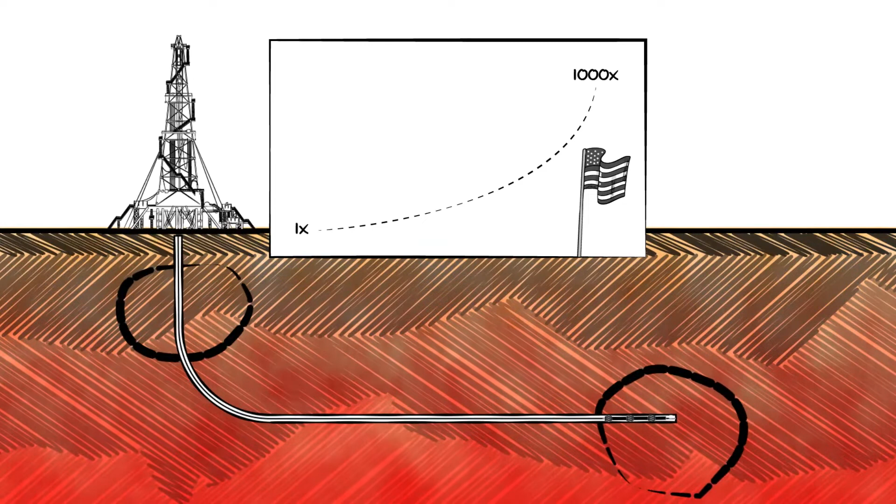It was rapidly adopted industry-wide and resulted in the U.S. shale boom that rearranged global geopolitics and ushered in an era of unprecedented energy security for the United States, taking the world by surprise. As pioneering teams charge into the field, experimenting with novel, scalable geothermal concepts, many in sedimentary formations leveraging the very techniques that Mitchell pioneered, the parallels between the shale boom and the coming geothermal boom are clear. But entities on the sidelines, including big oil and institutional investors alike, are awaiting one thing before jumping in: field data.

In the coming sessions, we have invited startup teams who have deployed new concepts, techniques, and technologies in the field this past year, and who have agreed to discuss previously unreported data and outcomes. So sit back, get your questions ready for the teams, and see if you can spot a geothermal George Mitchell.

Hey everybody, Jamie Beard from Project InnerSpace. Last was awesome, how did you guys like it? Pretty cool. So I remember back in 2020 when we started Pivot, it was really hard to get people from the oil and gas industry to talk on the record about geothermal. And they did, but the understanding was it would be vague and we wouldn't talk about what the entities were doing in particular. It was all hypothetical. Oh my gosh, look at how much that's changed in 2 years. I love it, it just absolutely makes me so excited.

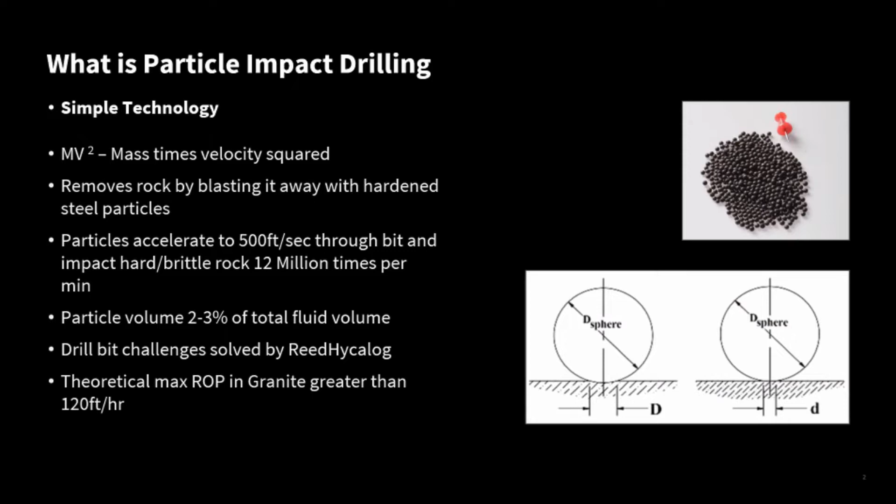It is very straightforward really. It is taking high density steel shot, the commodity item that any of us would use in a shot peening shop around the world to clean tools, etc. We inject it into the flow line in between the pumps and the top drive. Those steel balls pass down the hole and they accelerate into the drill bit particle accelerator. As they accelerate into that, they reach up to 500 feet a second, and just sheer unadulterated physics means that we get 12 million impacts per minute at 500 feet a second coming out of the bit. So we literally blow away the rock.

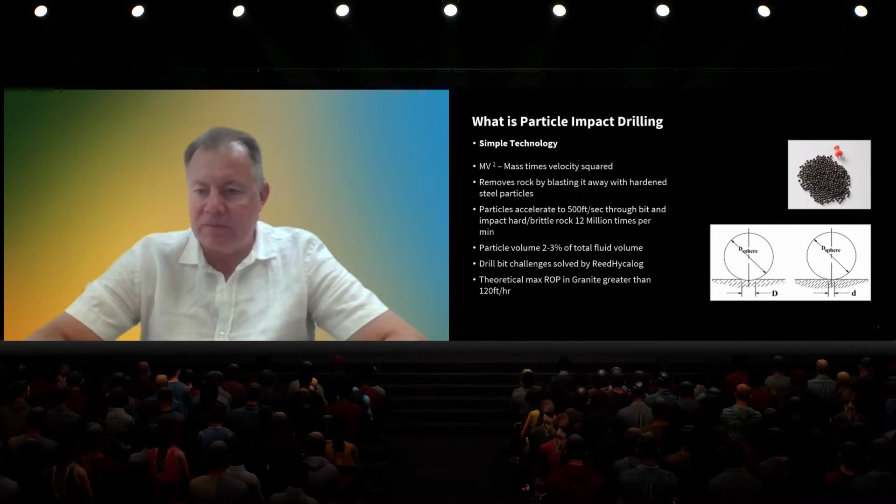Total volume is 2 to 3%. Simple technology. But the fantastic thing in this is that theoretical ROP is greater than 120 feet an hour, 40 meters an hour to those of you in metric. So this has the potential to drill significantly faster than any of the best PDC technology out there in the world at the moment.

It's straightforward. So you can see from the images on the screen, we have effectively a large particle processing unit, which looks like a cement mixer that you would see on the highway filling up the concrete. We then have a particle injection unit, which has 3 high pressure cylinders in it that we sequentially fill with the steel shot. One will be injecting, one is on standby, one is getting refilled. We then have a control monitoring cabin where the whole process is controlled, and this has been through all the checks and tests and is fully commercial and operational. And then for those of you thinking about what happens to the steel shot when it comes back out of the hole again, we have a triple decker shaker.

So we're typically going to get little arrowhead pieces of granite that are the little peaks that will break off. We'll get the arrowheads coming across the top shaker, the steel shot coming across the middle shaker, and the fine broken up feldspar and quartzite coming across the bottom shaker.

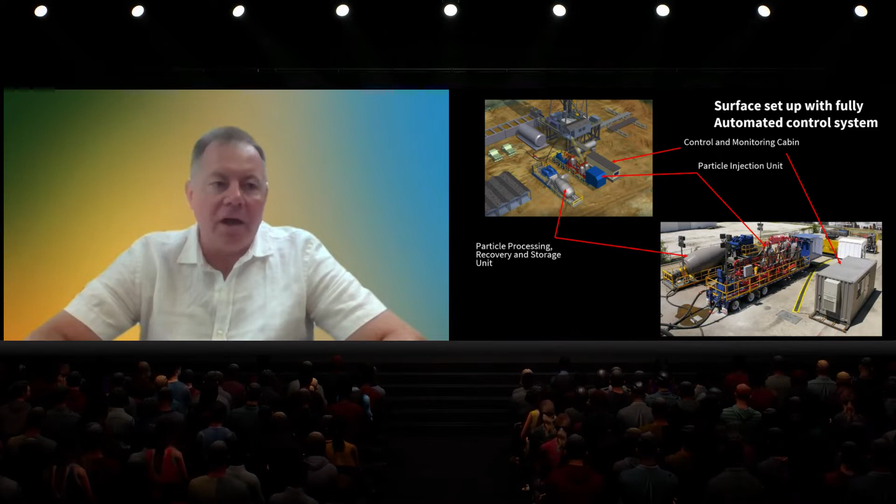So nearly all of the shot is recycled and re-injected and pumped around the hole. The other simplicity of this is how simple it is.

Some questions came up in the last session - what does a geothermal rig look like? Really, we can take any land rig anywhere in the world. Ourselves, we went and drilled with an old Kelly rig when we were testing this technology, but we can go with a sophisticated rig too.

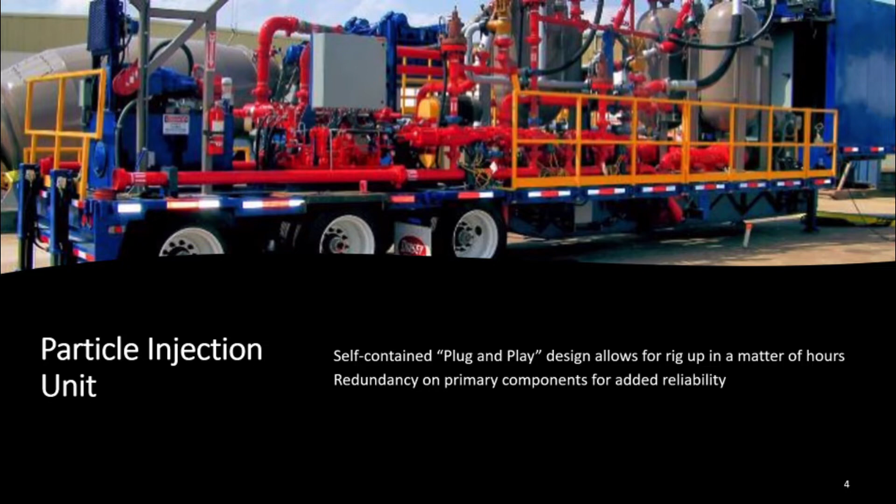So the journey we took is a really nice story. The previous session just had a whole bunch of service companies, and it was good to hear the investments that the different service companies are making in supporting and growing the startups.

So NOV, we met Particle Drilling last year, and we put a joint workshop partnership in place because we really wanted to take a look at the challenges, which was to try and make the particle drilling head, which John and his team knew could drill fast, but you wanted to make sure that the head survived and didn't become the limiting factor.

So when we put our heads together and looked at the technology, we saw - why don't we combine the latest PDC technology with the drilling methodology, which is continuous. Keep adding steel shot to the hole means that if we can keep the diamond lasting, then we can keep injecting more and more steel, and the bit runs get longer and longer and longer.

So we looked at the external design and came up with a plan to have a particle pilot and then a diamond reamer. In the images on the screen, the little grayed out area shows the rock that is being removed by the particles, and the remaining part of the hole is going to be opened up by the PDC.

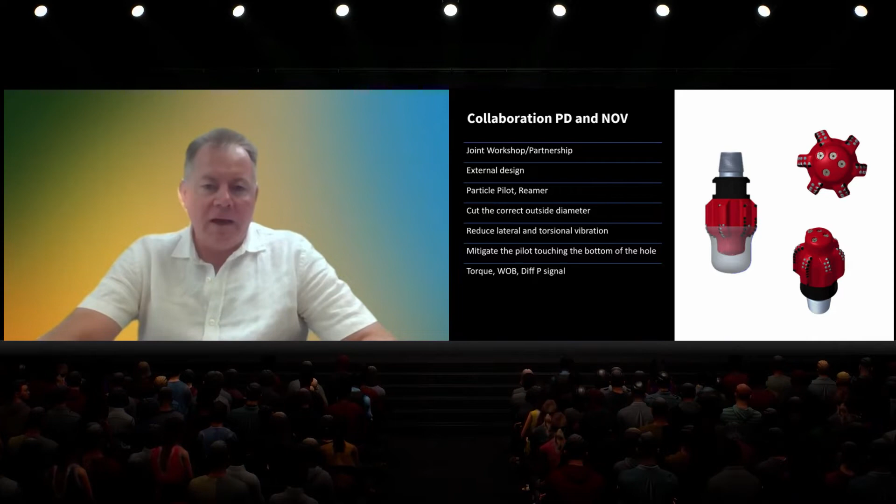So onto the data - we designed one of these bits, and this is the thing that Jamie's been whipping us all about: speed. We all got to get this geothermal bandwagon moving faster, and we really went from first conversation to lab tests in 4 months. It was fantastic.

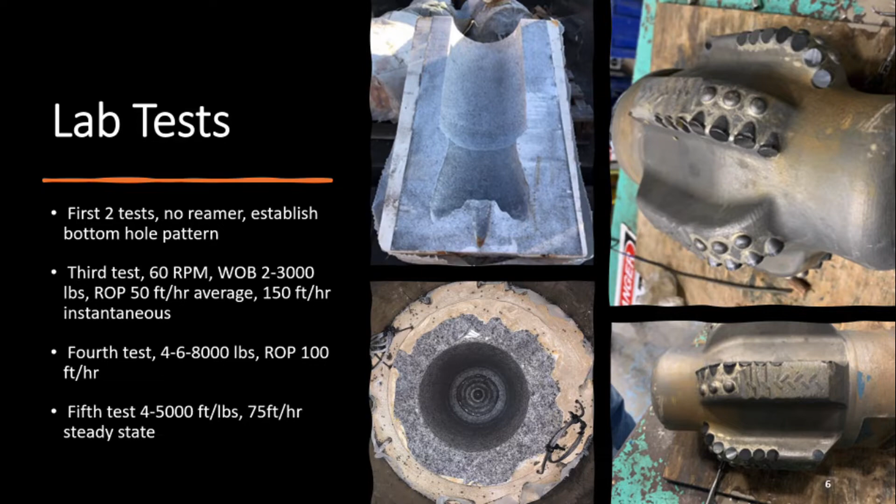So the images you got on the picture show are from different lab tests that we did in the drilling lab in Conroe. For the first 2 tests, we didn't bring the reamer into contact with the rock slab that we had in the drilling lab - we just wanted to see what the bottom hole pattern was doing.

We then did a third test at 60 RPM with 2,000 to 3,000 pounds, and we were doing 50 feet an hour average, but we could get up to 150 feet an hour instantaneous.

Fourth test: 8,000 pounds with an ROP of 100 feet an hour. This is what we want - we're really getting up there into those speeds that make a huge economic difference to geothermal.

And the fifth test was just nice steady state, 4 to 5, and we got 75 feet an hour. You can see from the images that the bottom hole pattern rings are produced from the particles, and in the top left image you can see the kind of pattern that the reamer creates in removing the remaining bit of the rock.

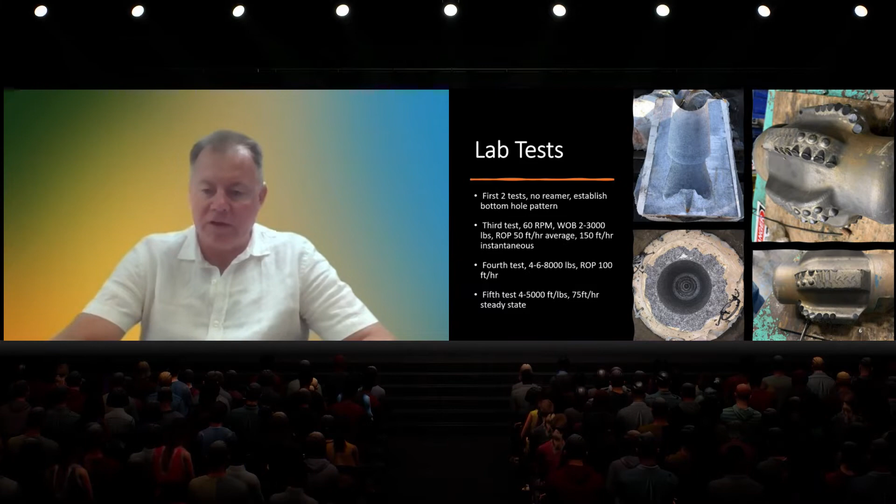So the internals, basically the design is most of the rock is removed by the particles, because we don't want to be limited by PDC. We had to engineer the internal flow paths to make sure that the particles are not eroding the bit from the inside to the outside. So every bit of fluid dynamics design is to minimize any internal erosion. We don't want that to become the Achilles heel of the product, so it's all very smooth flow paths inside the bit.

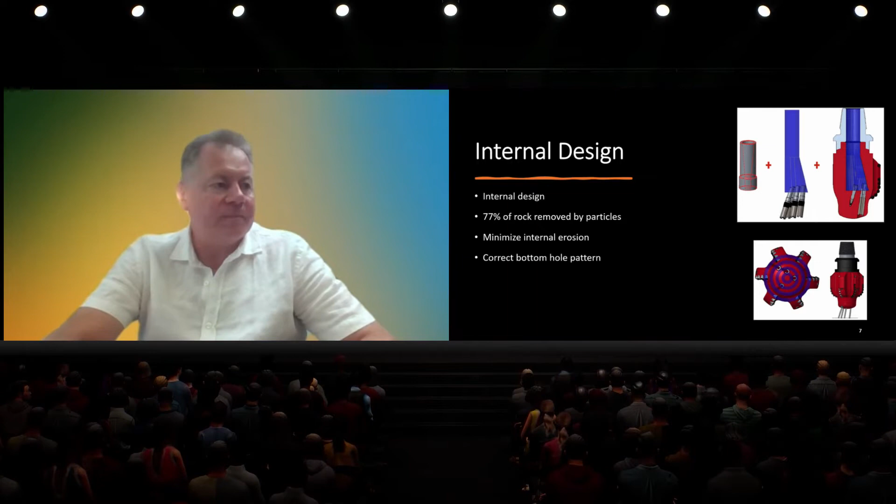So the next step was to go and find a hole to drill. Unfortunately, we couldn't find any of you geothermal gang drilling granite at that time in Texas or in the United States, so we had to find our own well. A quarry owner in Central Texas, who John knows, lent us his quarry.

So we were hanging out there with the people cutting countertops for kitchens, and we spudded into 45 kpsi pink granite. For those of you who aren't geologists, this stuff has huge quartz phenocrysts, veining through it, and large mineralization. So it's really dynamically very hard to drill through.

We ran two particle drilling hybrids in it, and each one did roughly 490 feet. The total footage was 980 feet, or 298 meters, at 43 feet an hour, or 13 meters an hour. Straight out of the box, we felt really pleased with this.

We also, through all the drilling trial and error, pretty well knew what we could do to improve version 2. We had some simple challenges in that we spudded into granite.

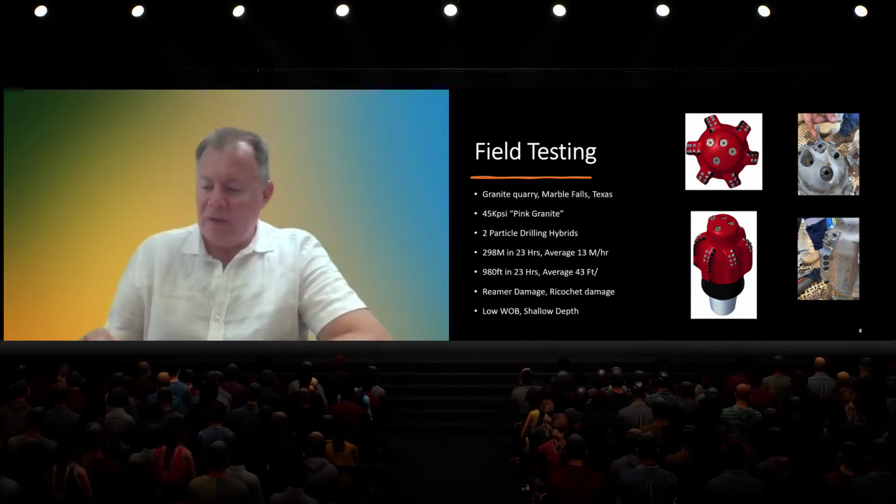But you can see from the images - one of the curious ones - the nose is pretty beaten up and quite eroded. But one of the nozzles that hasn't touched the bottom shows no erosion. So there was a sort of 'ding' moment: what's going on here with the nozzles, because the material they're made of seems to be outliving the matrix the bit was made of.

So as we cut the bit apart and dug into the challenges we saw, we thought, right, number one, let's change the material of the body. Let's go from TMS matrix to cast carbide, which is pretty well the toughest material you can make a PDC bit from.

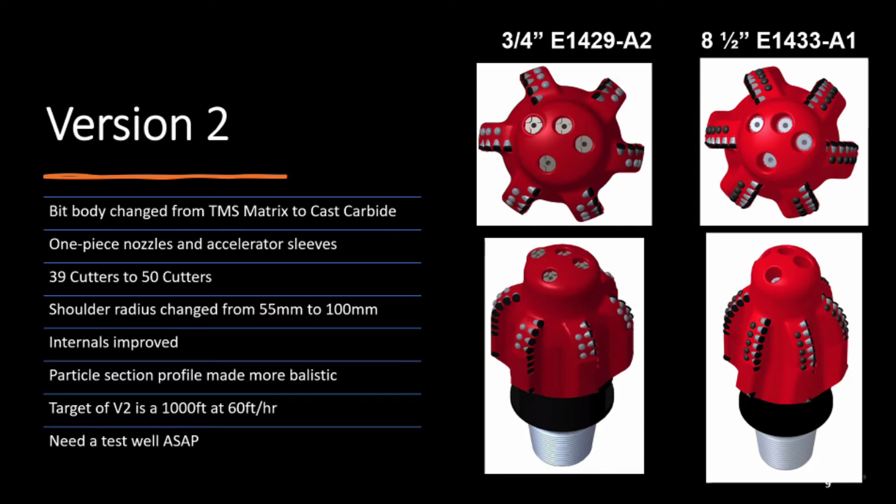We didn't really have problems, but to improve manufacturability, we went to one-piece nozzles and accelerator sleeves inside - six-inch long nozzles inside the bit.

We saw damage on the PDC cutters, probably because the radius was too aggressive, so we opened up the radius to get more diamond in there. An instant upgrade would be to take the best cutters from Forge and put shaped cutters in there, more diamond, because relative to a normal PDC bit, this has relatively low cutter count, so we could afford to put some diamond in there and just make this thing last longer.

We made the nose - if you look at the right and left diagrams between the 29 and the 33, you can see the new one's more ballistic. That's so that when the steel shot ricochets off the bottom, it's designed to bounce off to the side. We want to minimize direct impact - we want glancing blows, not direct hits. With the combination of the cast carbide and the new shape, we believe this will last significantly longer.

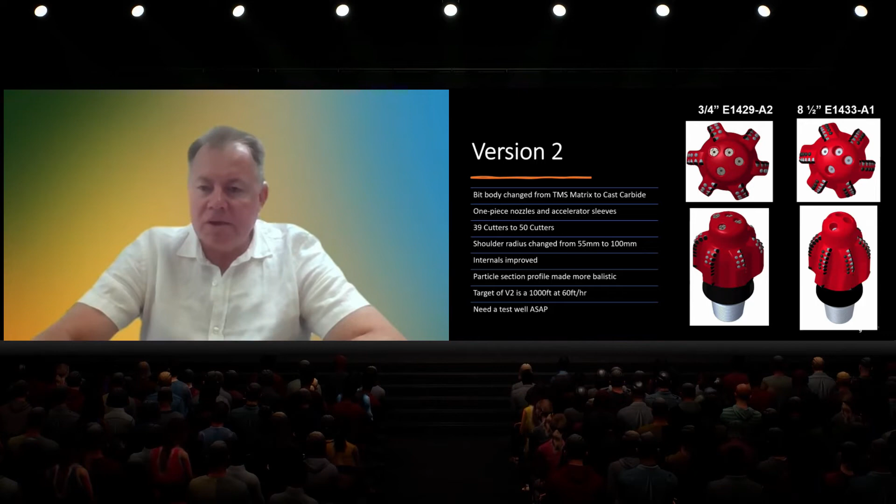So we want to take version 2 out there. We believe that from what we learned from well 1, with the redesign, we'd like to think we could boldly do 1,000 feet, 60 feet an hour, even with potentially a little bit of sandbagging in that number. So anyway, we need to test well ASAP - so someone who's drilling something hard in the United States, please give us a hole.